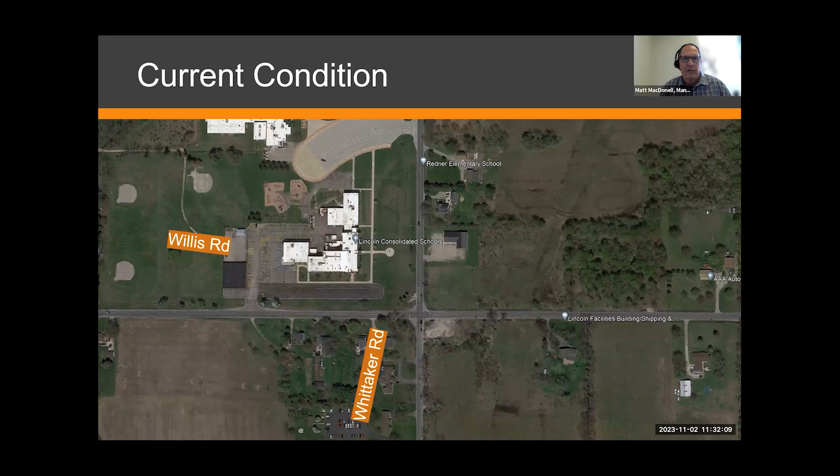And here's another view zoomed up. You can see the intersection there with the stop bars. The stop controlled corner on the northwest is the Lincoln Consolidated School Campus. Next slide, please.

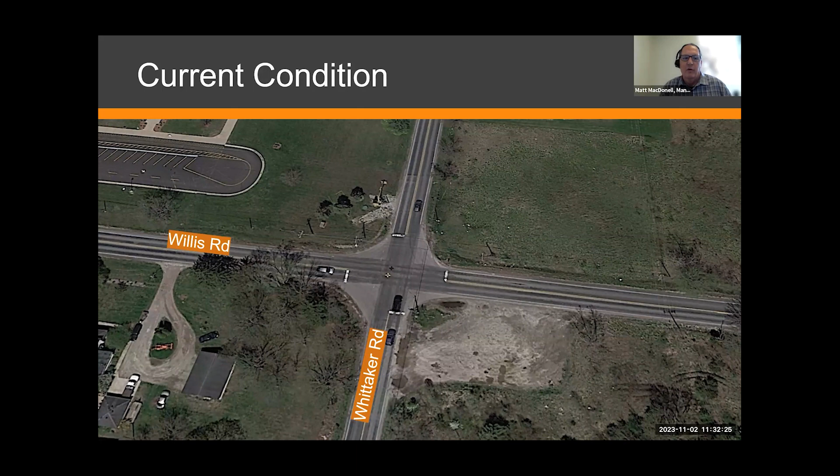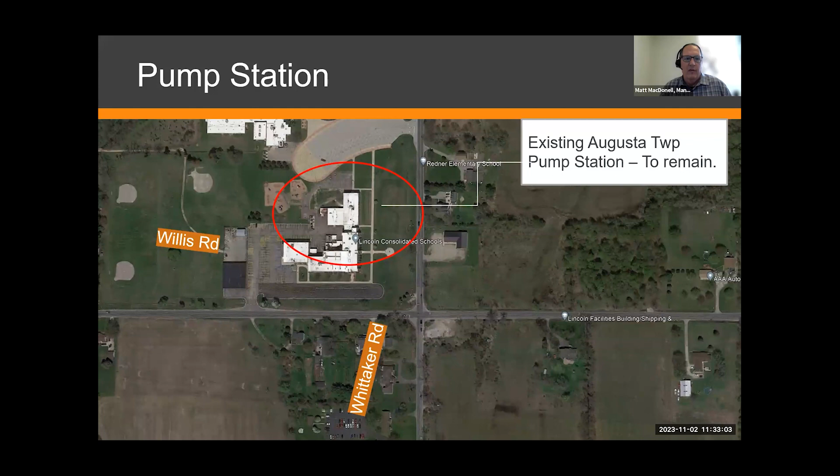Basically, we have an existing pump station. The pump station is located there - it's a sanitary lift station, owned and operated by Augusta Township. It's in the northwest corner of the intersection, circled here in red. That was definitely a consideration when looking at the intersection improvement project. Obviously, we wanted to avoid impacts to the pump station. Next slide.

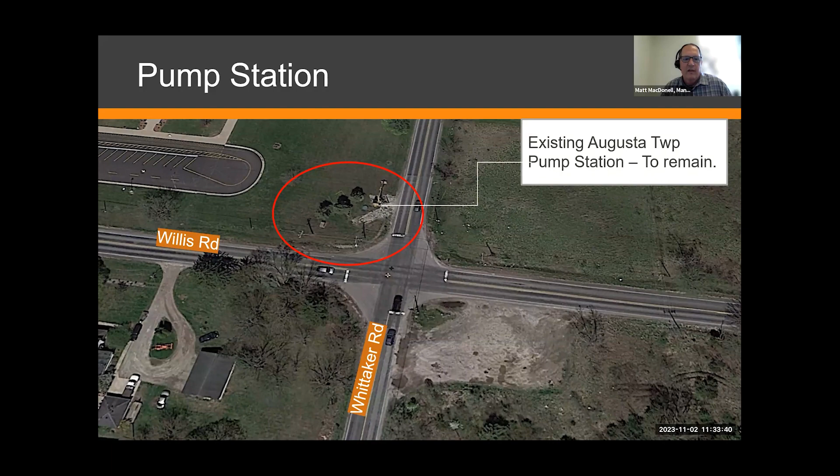What we are proposing is a single lane roundabout, and that's really what's depicted here on the screen. I wanted to make sure everyone's aware that the pump station is to remain at its current location, and that we are not impacting or requiring that pump station to be relocated or removed. That will remain in place. What we have for the proposed improvements is a single lane roundabout, and we will get into the details of that.

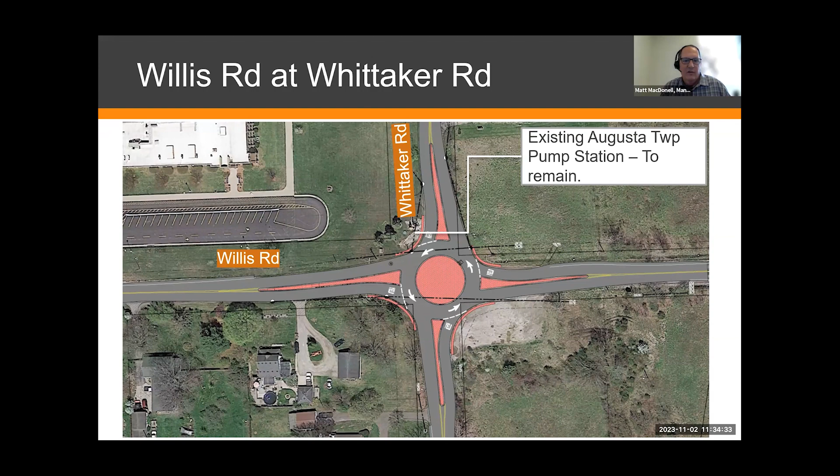I'm going to go ahead and turn it over to our next presenter, Nate Murphy. He's our Senior Project Manager for Design and Construction, and he'll be managing this project. Go ahead, Nate.

Good morning. Again, I am Nate Murphy. I will be the project manager for this project, and we just want to back up for a minute and talk about the project as a whole.

The next slide shows the corridor that we have here along Whittaker Road and the area roundabouts that we currently have. We just completed the one just north of this one, at Bemis and Whittaker, this past construction season. And you can see there's several others along this corridor.

We have considered this as a corridor project, taking the investment that the taxpayers have given thoughtfully, and we're looking at improving the traffic control considering the whole corridor as a whole. We will be adding this one here at Whittaker and Willis next year. Next slide.

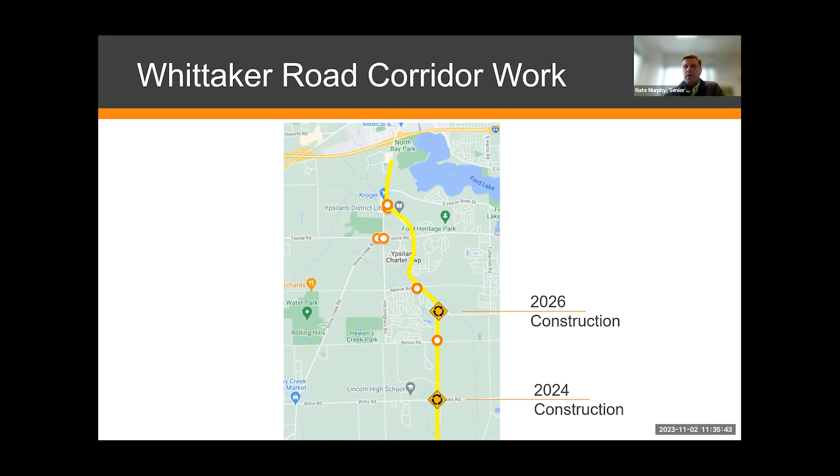The problem we're looking to solve is that most of our roadway network in Washtenaw County is a two-lane roadway, and we're looking to solve the congestion that happens at intersections. These create the places where there's conflict and congestion that builds up, and that's what we're looking to improve by bringing investment to this intersection in Augusta. Next slide.

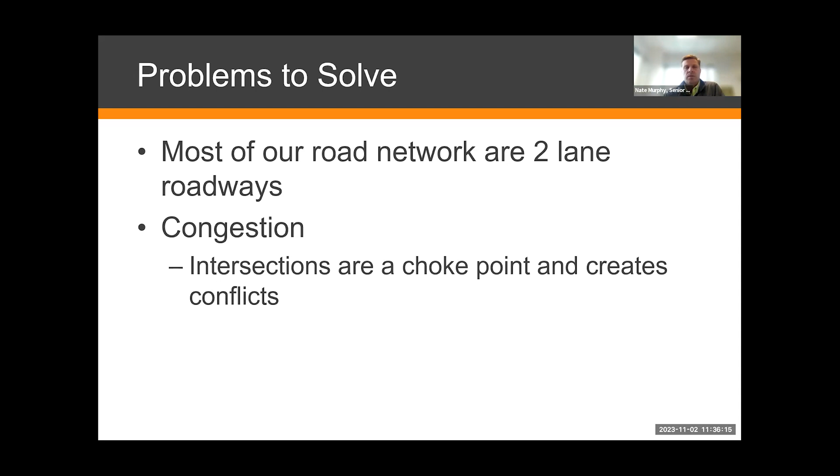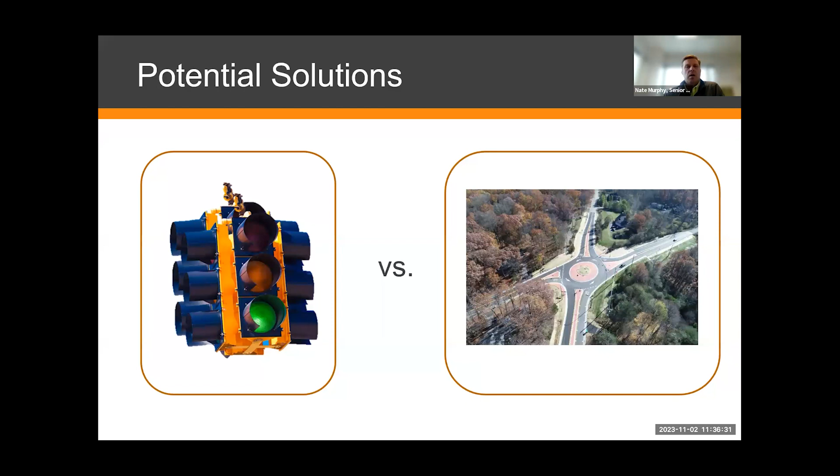So we looked at two different options for this type of stop-controlled intersection. We could either go with a signalized intersection or a single lane roundabout. And we're going to take a look at the single lane roundabout.

That's what we chose. We looked at this particularly on the safety side because using the roundabout, we have a 90% reduction in serious injury and fatality crashes, and a 39% reduction in total crashes.

The benefits we get through the roundabout: it provides a slower speed for traffic traversing through the intersection, and most of all, we get a much better traffic capacity through the intersection rather than having a four-way stop or a signalized one. Comparing the roundabout to a four-way stop, it reduces congestion considerably.

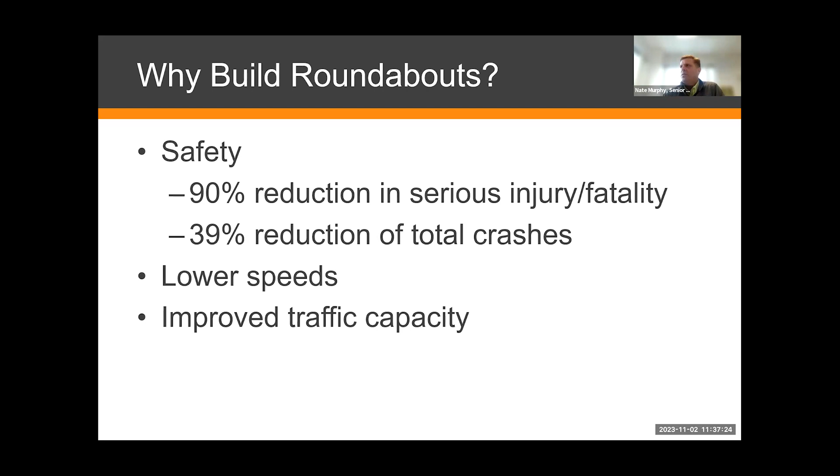And think about as you go through a signalized intersection when it's green and you're going through it, you're depending on the traffic perpendicular to you paying attention and actually stopping. If they don't, you could have a very dangerous impact, a broadside impact. That's something the roundabout handles nicely.

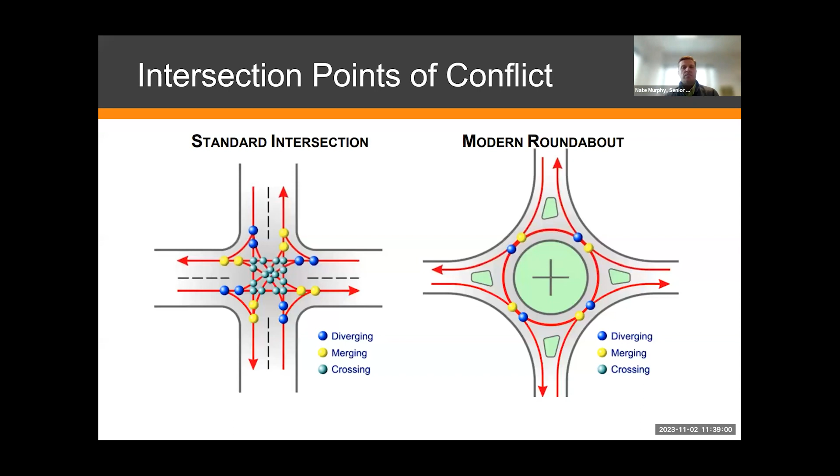You come into the intersection, there is a horizontal curve, it turns and causes the user to slow down. It also allows the intersection to be used by larger vehicles.

You have the center island that has a mountable curb on it. Larger vehicles can then traverse through it and track over these islands and still have no problem getting through.

We'll be using the DTE Community Lighting Group as a resource on this location here at Willis and Whittaker, similar to Bemis. We will be having them design and install lighting that will be necessary for safety, and these lighting fixtures are dark sky approved. They pay particular attention to putting the light on the roadway as opposed to the surrounding areas.

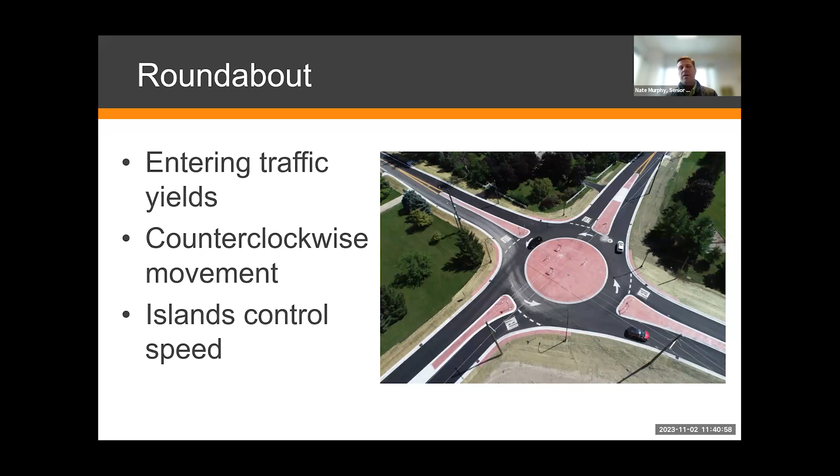It is just for safety, and we do pay attention to that. We point the light and use it in a very designed way so that we can keep the intersection safe. Next slide, please.

So the roundabout solves the congestion issue, promotes safety, and keeps the speed low. It does a lot of helpful things that solve our problems that we're looking for.

I think just seeing how well the other roundabouts in the community work - I'm sure you've traversed through them, and you can see the benefit we get from using this type of intersection. Next slide, please.

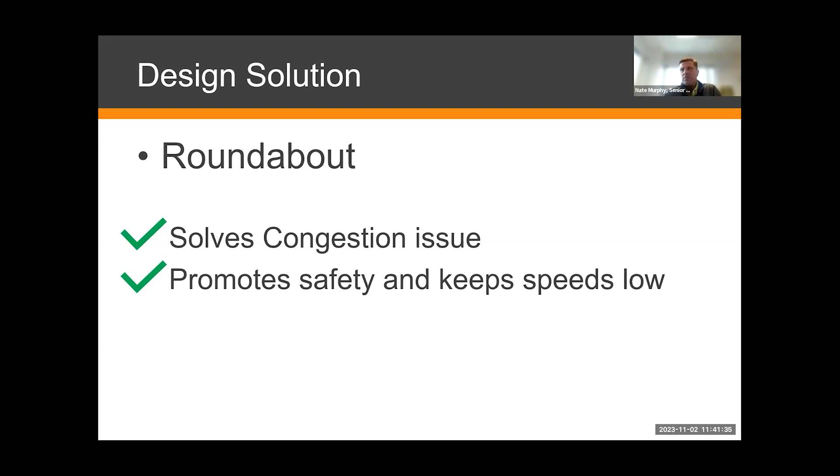If you need more information on roundabouts, we do have it on our website. We have a whole page for that, and you can get additional information there. Please check it out, there's a lot of good stuff there that you can peruse. If you have additional questions, I'm happy to help you with that.

Next slide, please. Project funding for this one is coming from federal money through MDOT, Michigan Department of Transportation, as well as the Michigan Transportation Funds. The estimated cost for the roundabout here at Willis and Whittaker will be $1.4 million.

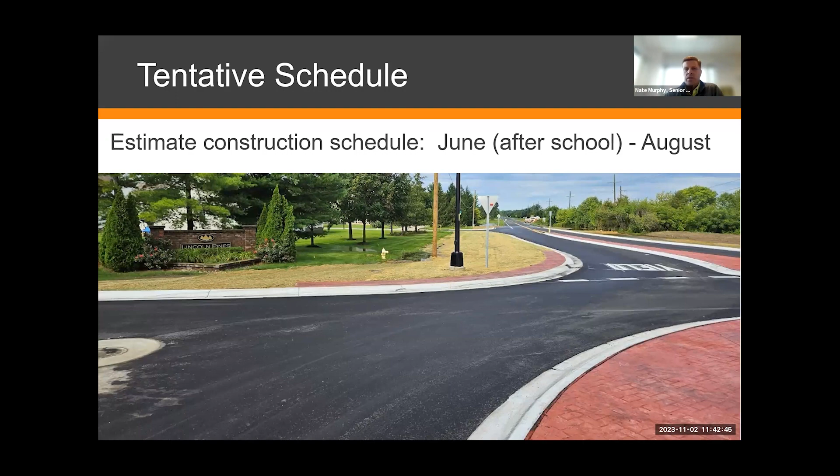Okay, the tentative schedule for our construction - we're paying close attention to making sure to impact school as little as possible. We're hoping to start after school gets out, and we'll be completing the project mid-August prior to the new school year starting up, so we hope that'll be minimal impact to the schools there.

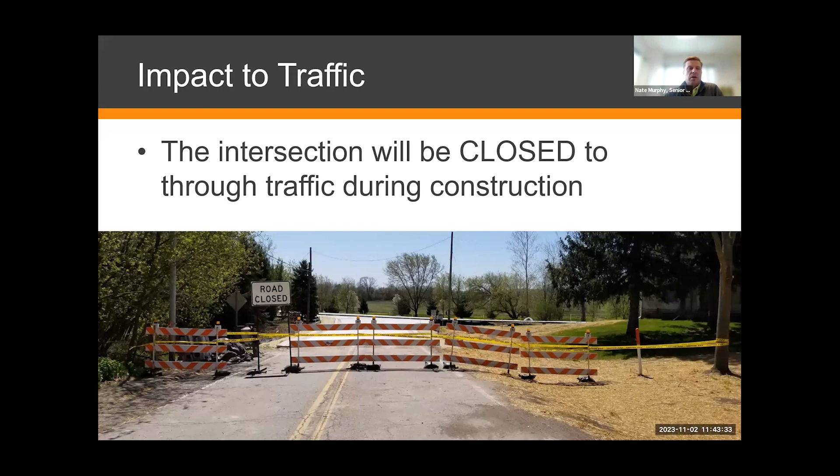We will be having another meeting in the spring as we get closer to construction, and we can go through all of the details that are necessary for the detour. But I want to underscore that it's very important that during construction there is no traffic that goes through the work zone.

The next steps: we'll be finishing the design of the roundabout with the consultant, and we'll be submitting these to an MDOT bid process that will take place in the spring, and that will be awarded through the MDOT bid letting process. Once they are awarded, we will be working toward getting construction started after school gets out. We will have some tree removals necessary prior to start of construction, and that is dictated by the environmental restrictions we have, and we'll be doing that work in their limited time frame.